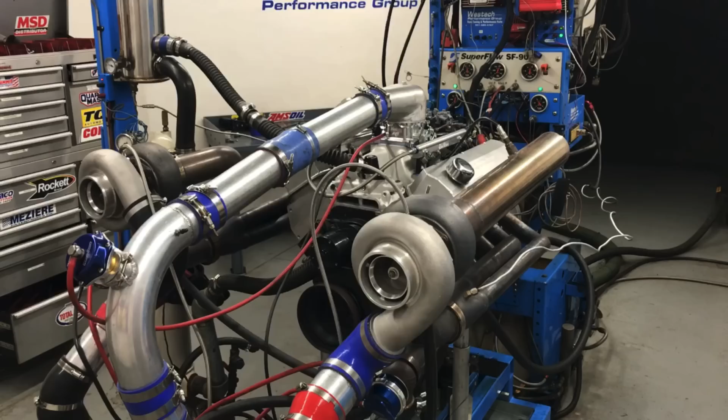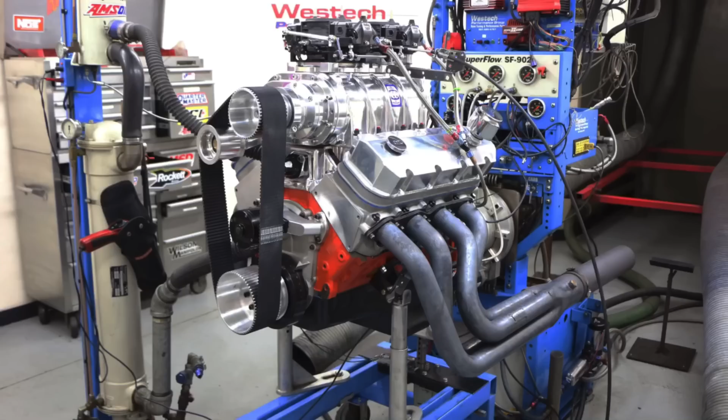What is the best power modification you can make to your big block Chevy? Of course, I'm talking about power adders - nitrous, blower, and turbos.

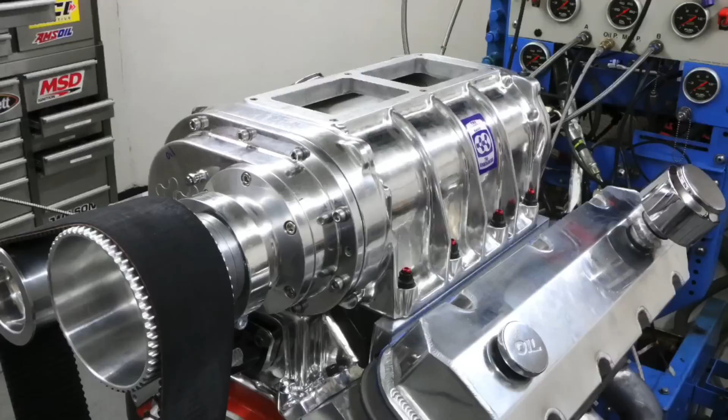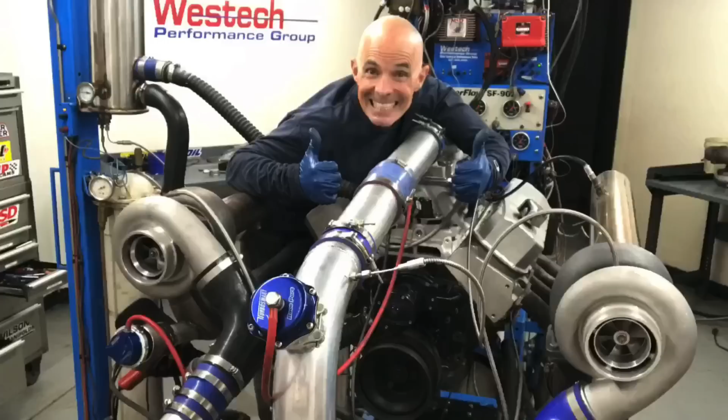In this video, we're going to take a look at test runs on big block Chevys with power adders, starting out with nitrous oxide. In fact, we got two tests run on nitrous oxide - the first one on a Junkyard 454 Gen 6, then we run it on a more powerful modified 496 combination to show you that nitrous does what nitrous does regardless of the combination. We follow that up with boost, a 671 supercharger on a 540-inch blueprint engine crate motor, a power adder crate motor, so we're going to add power to that. And we're going to finish things off with a pair of cheap eBay twin turbos on a 454. So we're going to go through these power adders fairly quickly.

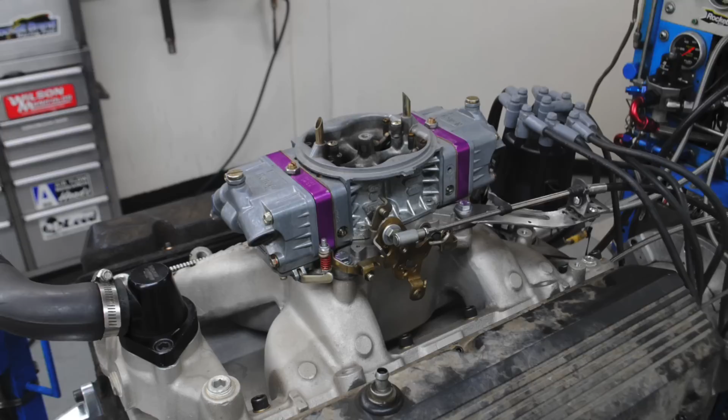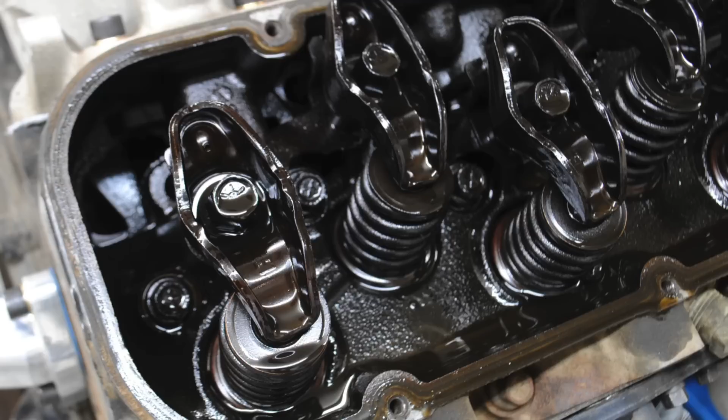On the big block setup, we ran a Junkyard Gen 6 454. This one was a 1999. I like the Gen 6 stuff because it has a hydraulic roller cam, a good head, small chambers, a little more compression than the peanut port stuff. The way that we run them normally when we get them from the wrecking yard, we take the factory fuel injection off - you could use it, but we replaced it with a simple dual plane intake, in this case an RPM air gap. We ran a 750 Holley, an MSD distributor, and long tube headers that we always run on the dyno. Otherwise, the motor was stock inside - we didn't change the springs or the camshaft or anything.

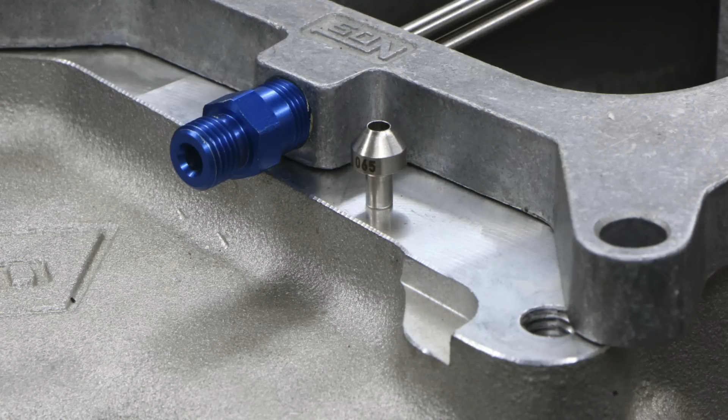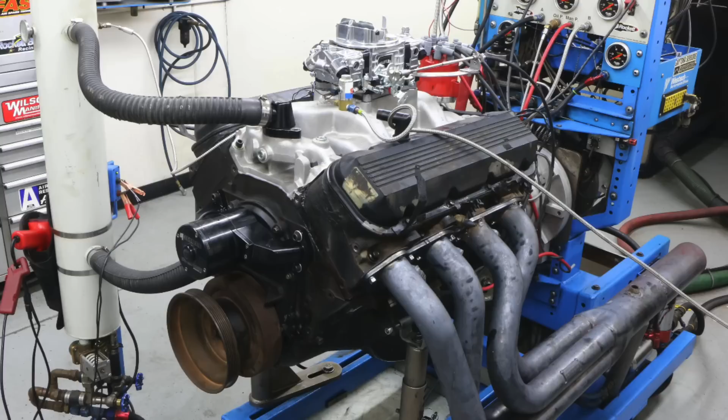Run in this manner with the dual plane intake manifold on our Gen 6 454, it made 376 horsepower and 481 foot-pounds of torque. But the way to transform this thing into a serious street performer, meaning something that makes over 500 horsepower, was to add a simple nitrous kit. We added an inexpensive Holley Sniper nitrous kit, which is still adjustable up to the flow limit of the small solenoids that they use. We ran a 65 nitrous jet, a 53 fuel jet, and had about 5.5 pounds of fuel pressure going to the fuel side of the nitrous kit because it ran independent of the fuel supply to the carburetor. With our nitrous activation and the right tune, you can see here a nice smooth curve - this thing made 529 horsepower and 662 foot-pounds of torque. So over 500 horsepower and over 650 foot-pounds, and we activated this thing down at about 3600 or 3700 RPM.

Obviously, good things are going to happen. Now, if you got a Fox chassis Mustang with this simple Junkyard big block and this very inexpensive nitrous kit, obviously good things would happen here. Making over 500 horsepower and over 650 foot-pounds on the nitrous, you could even activate it earlier to get even more torque. But obviously this Junkyard motor with a nitrous kit would be a real player out on the street.

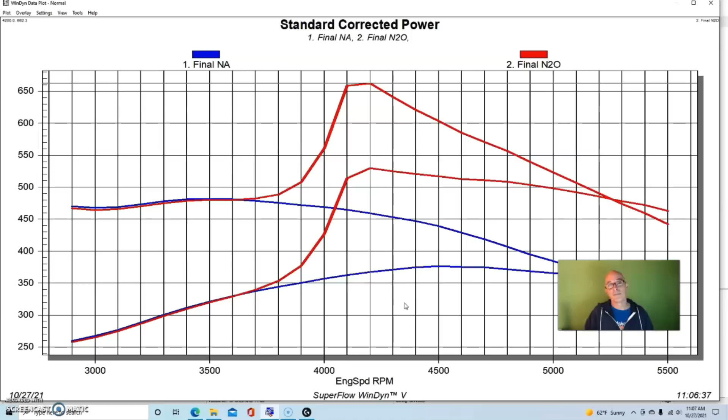To illustrate that nitrous doesn't just work on a Junkyard motor - in fact it works on any combination. Whatever the NA power output is, that's your starting point, and then you add nitrous to that. So it doesn't really matter what cylinder head or camshaft you have. Just think about the motor you're building as making NA power, and then you're adding however much nitrous you're going to add to that.

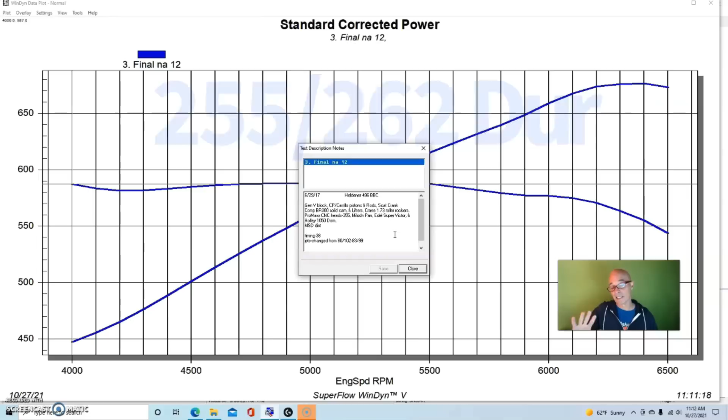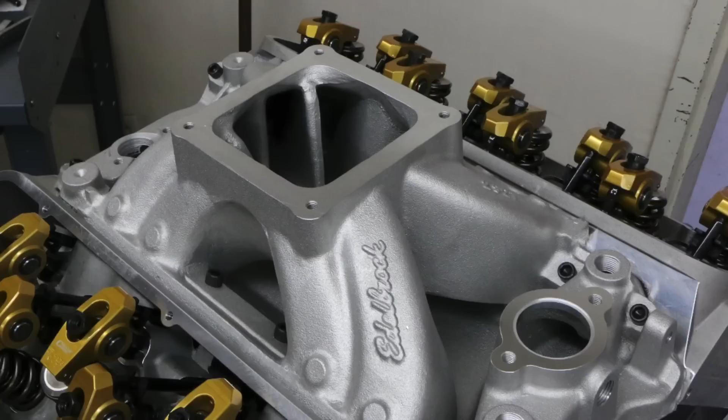So I'm going to illustrate that on this 496 - a Stroker 496 big block Chevy. It had good stuff in it: CP Carrillo rods and pistons, a Scat stroker crank, the 4.25 stroker crank, and the Comp BR300-14 camshaft, a solid roller, but relatively mild for a solid roller. It's designed as a blower cam, but as you'll see, it works very well as a nitrous cam as well. I'll go ahead and put the specs up here. We had roller rockers on it, a set of ProMax CNC ported heads, and a Milodon pan with a windage tray. We ran an Edelbrock Super Victor intake manifold and a 1050 Dominator.

And this thing made pretty good power for a 496 - it was only 10.5 to 1 compression. It made 677 horsepower and 589 or 590 foot-pounds of torque, so it did very well. Here's what happened after we added our nitrous to it. This was a Zex perimeter plate and was a 150 shot, and we engaged it fairly late - we just wanted to show you what's going on with nitrous and how well it helps. But you can see the curves mirrored each other, meaning we got the tune right on the Zex.

Run with the nitrous, the power output jumped to 859 horsepower. Peak torque was 769. Again, if you engage this earlier, anywhere before 52, you're going to add more torque than horsepower. So if you add a consistent horsepower amount, the torque is going to go way up.

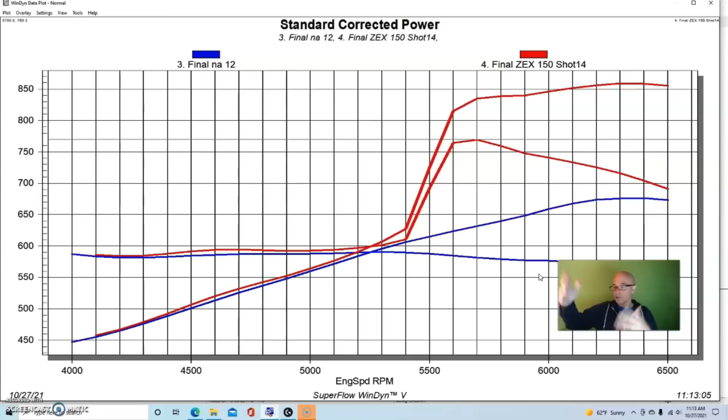So you can make obviously good power when you're starting with a healthy motor and you add nitrous to it. If you're adding, as we showed earlier, a stock motor and you're adding nitrous to it, nitrous always works no matter what you put it on.

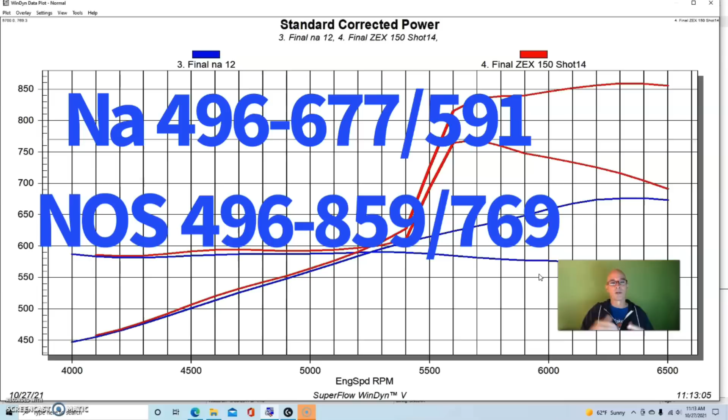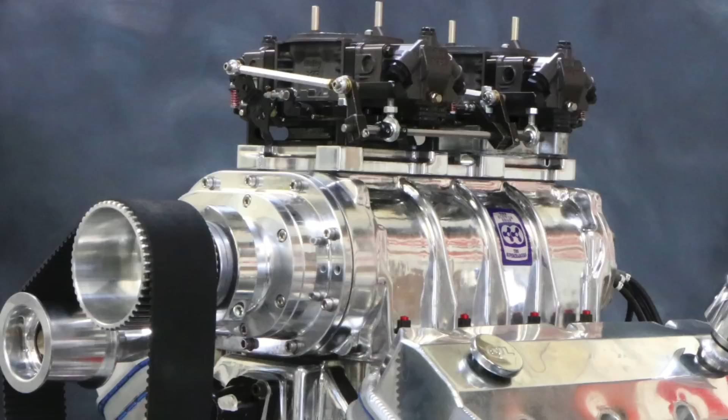Jumping into the big blocks even further, with power adders, we're going to take a look at a supercharger, and what would be better on a big block than a big roots supercharger, and that's what we did. Actually, this was not a big one. You could put much bigger blowers on here, but we ran a 671, and this thing worked out fairly well.

This was a 540-inch crate motor from the guys at Blueprint Engines, and it was a power adder crate motor, meaning it had low compression. It had their as-cast aluminum big block cylinder heads.

It had the same camshaft that we ran on the 496 with the nitrous. It was a BR 300-14 comp cam, and I'll put the specs back up here, but it's basically a blower cam, which we were running a blower with. It's also a nitrous cam. It's also a turbo cam. It's also a good NA cam, because camshafts are just camshafts.

Now, we ran this thing with a Weiand Team G single plane intake manifold and a Holley carburetor. We ran a 950 XP, so this was a 4150 style intake manifold. We ran the long tube headers that we always run and an MSD distributor. We ran the thing NA before we installed the Weiand supercharger.

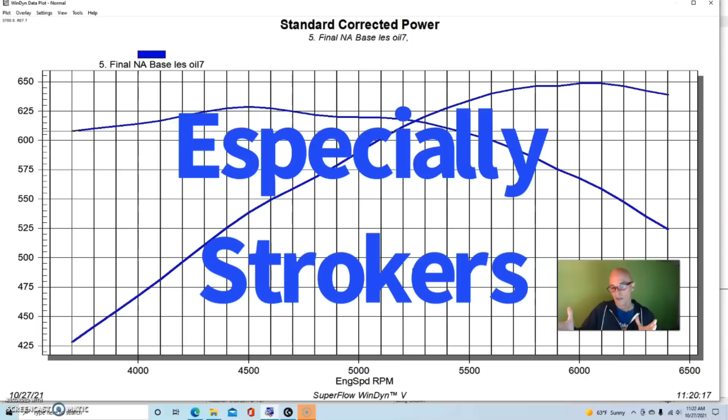Run in this manner, you can see some of the notes here that we played a lot with different oil levels, because it's very important on the big blocks that they have windage issues if the oil level is too high. And almost always we find the pan rating, the oil level pan rating for the oil pan, is always too much. So if you have something that says it's supposed to be a 9 or 10 quart pan, if you put that much oil in it, you will definitely get windage in your big block. We usually have to take oil away for these things to make them work right.

But run in this manner, our 540-inch motor made 649 horsepower and 629 foot-pounds of torque. Remember, this thing was low compression. This was, I think, 9-to-1 or less.

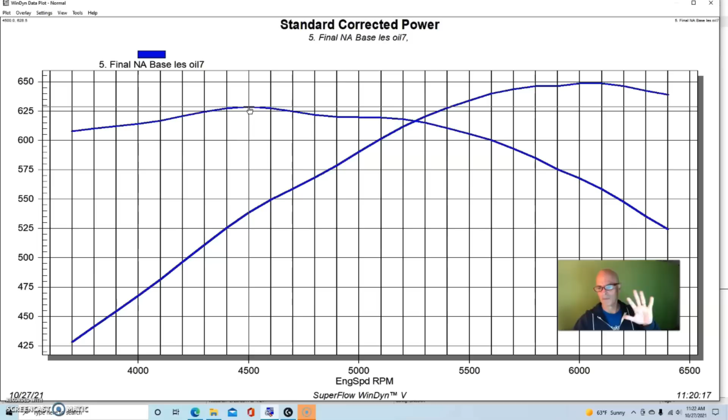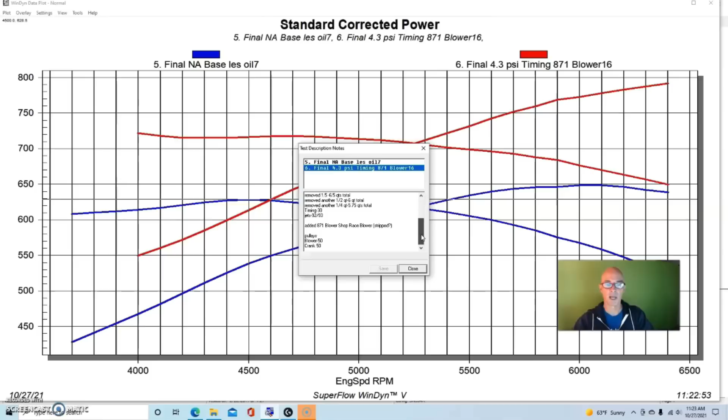But here's what happened when we put our 671 on, and I know the description here is going to say 871 - that's because I originally thought it was an 871. It was actually a 671. We ran this 671 with two, I think they were 750 - yeah, it was a blower shop, but it was a 671. We had a 53 crank pulley and a 50 blower pulley. So it was driven, and it was two 750 blower carburetors from Holley on this thing.

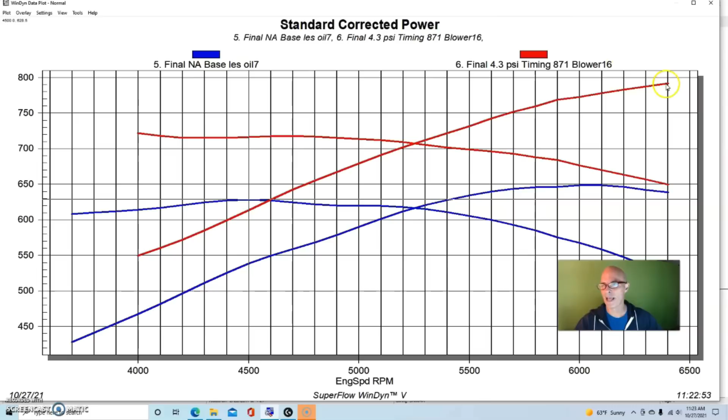So we ran this at about 4.3 pounds of boost. The peak power jumped up to over 790 horsepower. Peak torque was up to 717 foot-pounds, but we were just getting started because we weren't even really spinning the blower very fast.

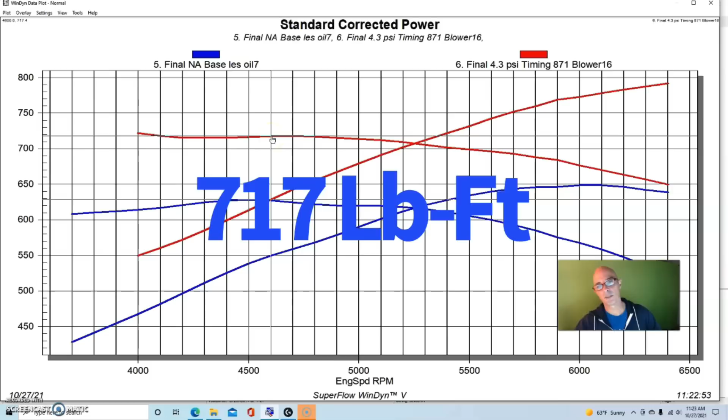Here's what happened when we sped the blower up. We sped it up to about almost 8 pounds, 7.8, and you can see power's up quite a bit, over 880 horsepower now, and torque is up to 804 foot-pounds.

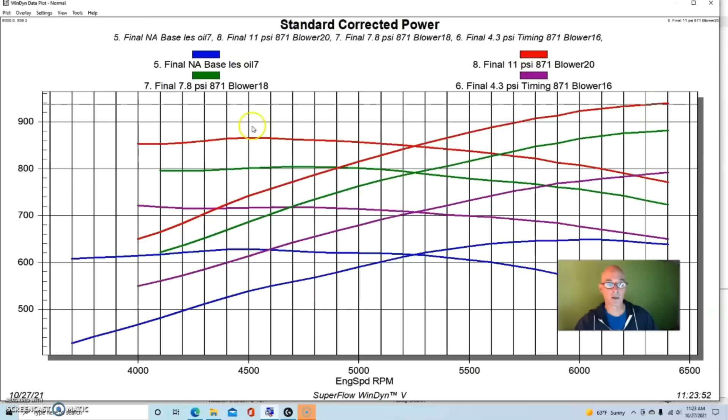And then we stepped things up again and ran a little over 11 pounds on this thing, where it made 938 horsepower. Peak torque was up to 866 foot-pounds. And you can see this is the typical kind of railroad track thing for NA power output.

The thing that's important is we went from the single plane intake to the short runner blower manifold. It changes the shape of the curve a little bit. But once we just got into changing the boost, it just railroad tracks - more boost is just more power everywhere, and that's exactly what we saw here.

I don't know how much this 671, it was a stripped blower from the blower shop, I don't know how much it would support. I think we could probably make over 1,000 horsepower with this on this combination if we spun the thing up. I'd like to see intercooling on it.

The one thing we didn't run - we ran this on race gas - if we ran this thing on E85, it definitely would have made a bit more power, even at this boost level, and we could have spun this thing even faster. But here's what happens when you combine a big block with boost from a big roots blower.

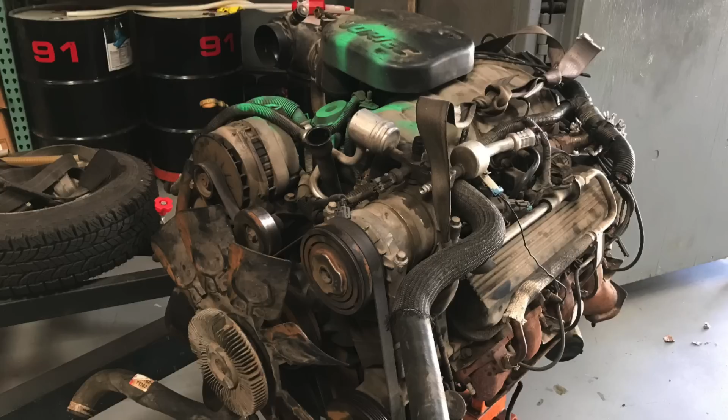We didn't turn it up that high in this combination, but this motor was a Gen 6 454 from the wrecking yard, upgraded because it was being prepped as a big bang deal. It was a Gen 6 with a custom cam, 561 lift, 233/239 degree duration, and 118 degree LSA. We were trying to stretch power production higher in the RPM range, but it turned out to be not that effective. I'll do a whole video on why I haven't run the big block big bang. This one also had a set of ported Dart oval port aluminum heads, 275s, and an Edelbrock Victor Jr. 454R EFI intake manifold so we could run it fuel injected, with a 1000 CFM throttle body and 80-pound injectors, all run with a Holley HP management system. Run naturally aspirated, this thing made a bit over 500 horsepower, 510, and peak torque checked in at 497 foot-pounds.

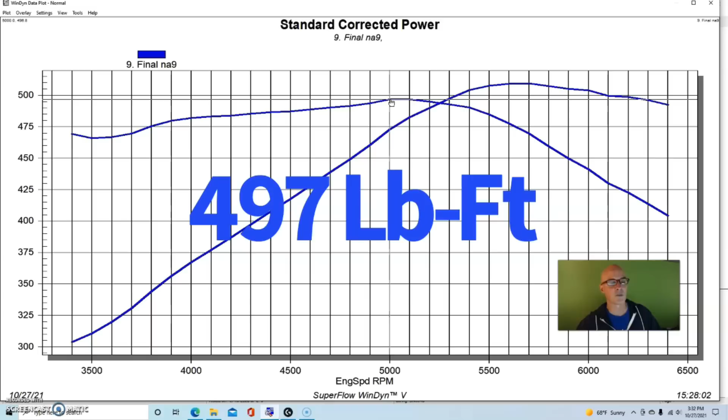Here's what happened when we added our twin turbo setup. Jason over at JT Fab hooked me up with a set of tubular forward-facing manifolds, or headers more aptly, to run our twin turbo stuff on. We ran a pair of GT45 turbos through an air-to-water intercooler.

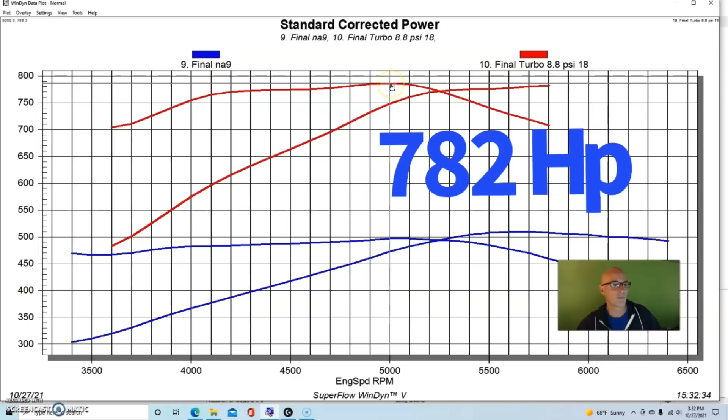Here's what happened when we ran basically 8.8 pounds of boost. You can see how nice and flat the torque curve was, especially on this scale, compared to 497 with the NA combination. We saw the same kind of thing with boost, and we'll see that again as we raise the boost. At 8.8 pounds, this thing made over 780 horsepower and over 780 foot-pounds. We'll go ahead and put the peaks up here.

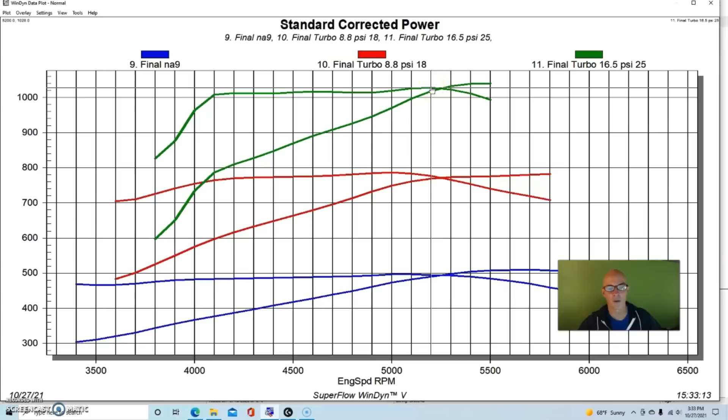But here's what happened. We ran it up in successive stages, more and more boost. I'll show you what happened when we ran it up to almost doubling the boost, 16.5 pounds. Again, exactly the same shape curve, a big flat torque plateau. Peak power was a good bit over 1,000 horsepower, over 1,040, and peak torque checked in at 1,028. So this combination worked fairly well, easily 4-digit stuff, and there was more power left in these GT45 turbos. Because now we're running two of them, we don't have to worry about the back pressure. These things will support 1,400 or more horsepower on a big block if we had enough motor. We have enough turbo. Let's get to our conclusion.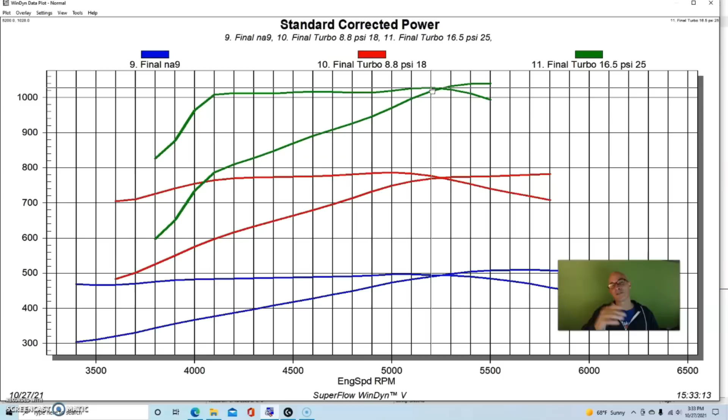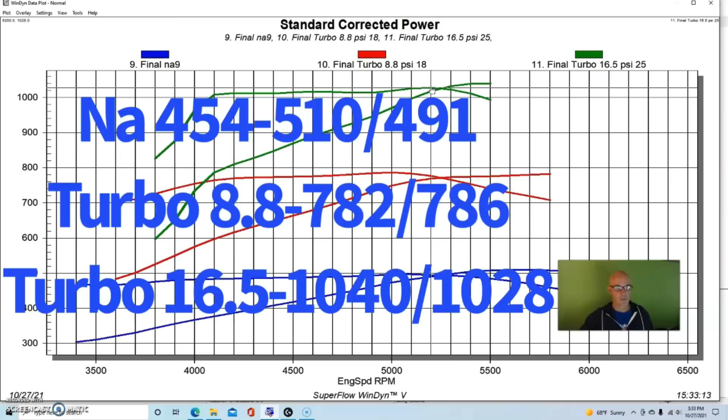Okay guys, I think it's pretty safe to say that combining lots of displacement with a big block and a power adder is kind of a match made in performance heaven. Starting things off, we applied nitrous to our junkyard motor and got your typical over 500 horsepower, which is a good combination in a nice light chassis. Lots of tire spinning, good ETs. You can go out and run that basically everywhere.

The cool thing is we showed you that nitrous does what nitrous does regardless of the combination. Yes, it works very well on a junkyard motor, but it also worked very well on a modified motor. In fact, we can go beyond that. You don't have to just apply it to a big block. You can apply the same amount of nitrous to a small block, a Ford, a Hemi, or an inline 6-cylinder. It really doesn't matter.

Nitrous always works. So our next test, we showed that a 671 blower, in addition to looking very cool sticking out of the hood with two carburetors, also makes really good power, especially when you apply that 671 on top of a 540-inch stroker big block like the one we did from Blueprint Engines. The next thing, twin turbos. Even cheap eBay turbos can make massive power. We went well into the 4 digits with plenty of power left from two very small, very inexpensive turbos.